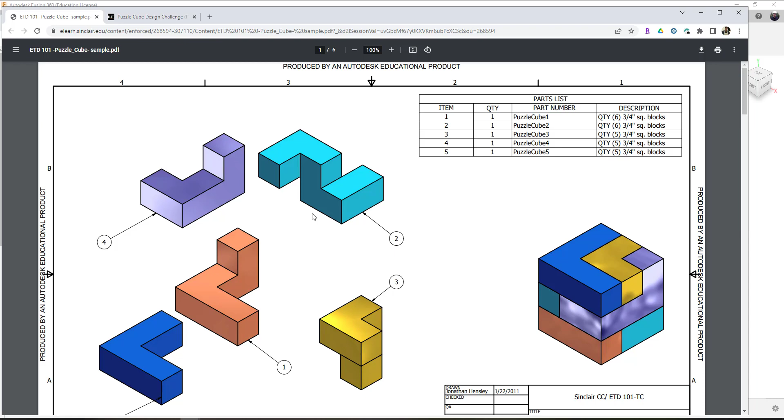You're going to basically be creating a PDF package of drawing sheets. This PDF package will look similar to this, where you've got your puzzle cube exploded assembly, solid assembly, parts list, balloons on sheet number 1, and then all the subsequent sheets afterward indicate the individual parts and dimensions.

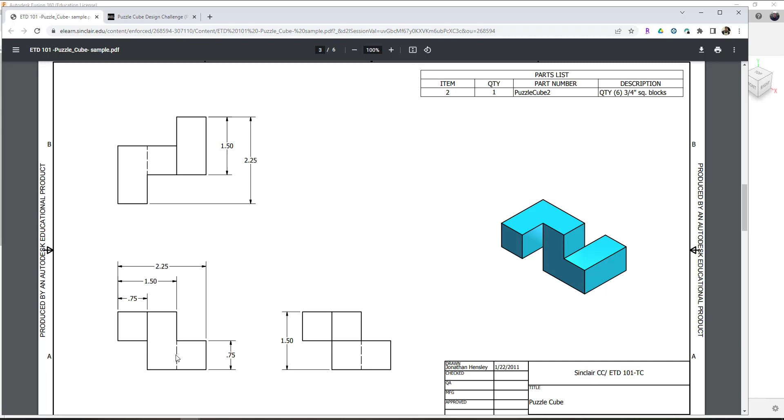Now it's important, like in this piece, to have it fully dimensioned. You're going to have hidden lines shown for the surfaces that you can't see, and the dimensions indicate the size of the object. Notice that all the dimensions are dimensioning to solid lines. Nothing is being dimensioned to the hidden lines.

Each of these parts ultimately gets created in a similar fashion. The rules, you've looked at those before. You can't have the same parts. You have to have a minimum of 5 different parts, and you'll have 6 drawing sheets. So 5 parts plus the 1 assembly, exploded assembly.

So in this video, we're going to show you how to assemble some of the puzzle cube parts, how to explode them, and how to create a drawing sheet of the puzzle cube. We're going to do that here in this instructional video. I've created a couple of puzzle cube parts already. We're going to create a third one.

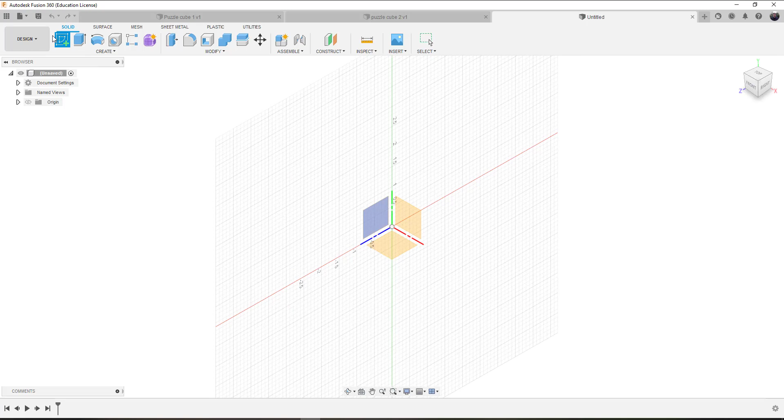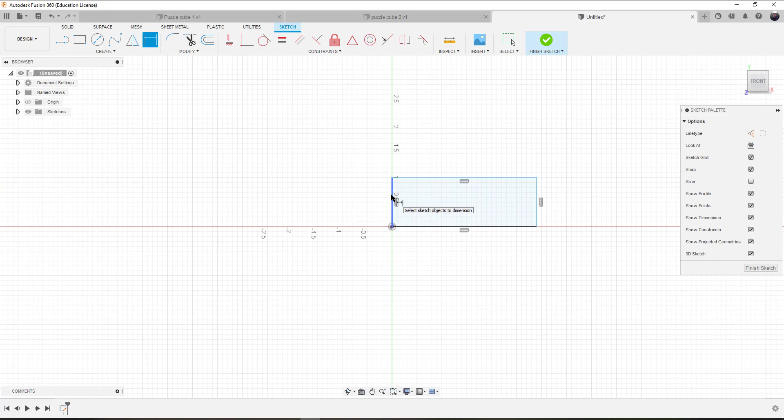Again, when you start, you're going to pick the sketch command. You'll pick one of the 3 XYZ locations. I'm going to work in the front view. This particular cube is going to be kind of unique, so I'm going to use the rectangle and create a rectangle shape, and dimension it - that needs to be 0.75, and this one is going to be 1.50 for the overall length.

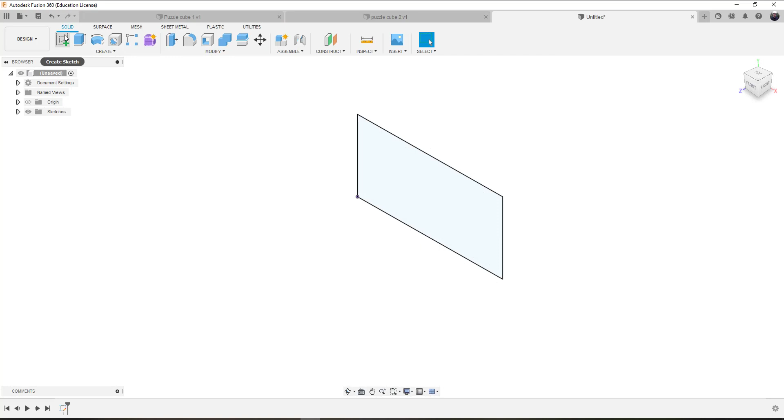We'll go back to the home view up in the upper right hand corner, and we'll extrude this and finish the sketch, extruding it by 0.75, because each one of these cubes is 0.75. And I'm going to create another cube that's going to sit on top of this.

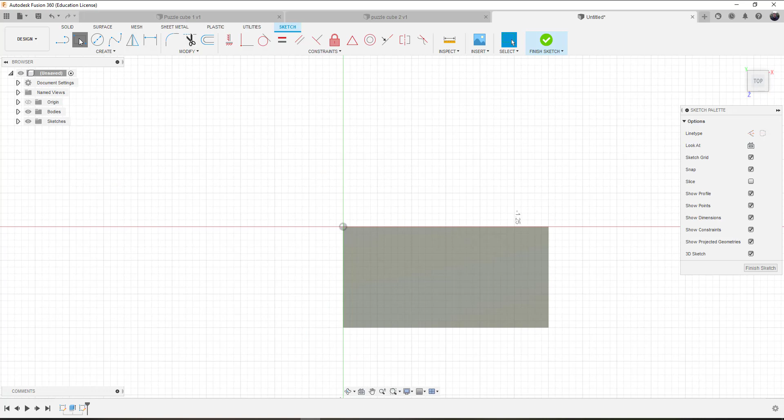So I'm going to create a sketch, select the top of the cube, look down at it, and then create a rectangle for this particular cube. Again, it's our call on how we want to design this part. So this cube is going to be 2.25 inches long, basically 3 cubes, and 0.75.

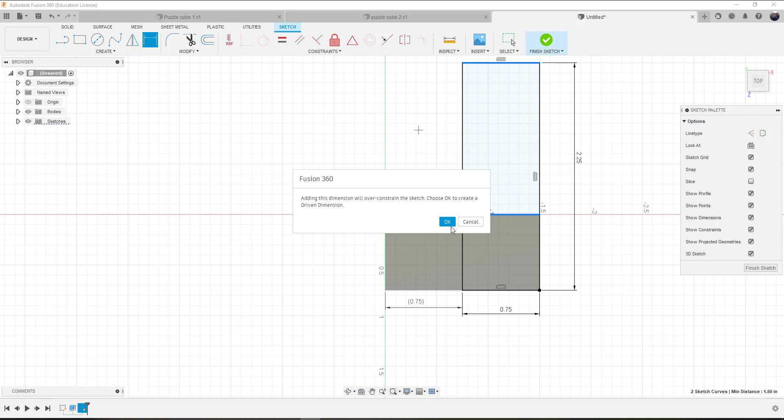If you think about it, this not only has to have the size, but we also have to have the position, because I might have picked points that are not accurate. So we're going to dimension the side of the object to the side of the original cube, and if it comes up and says it'll over constrain the sketch, fantastic - that just means I don't need to place that dimension, that it is accurate. The dimension from here to the face of the cube should be 1.5, and again it tells me I don't need that. So this particular cube is anchored.

Now I place the dimension as what is known as a driven dimension, or a basic dimension is the other term you're going to hear, and that is the parentheses. So it's not used for calculations, it's there just to give information.

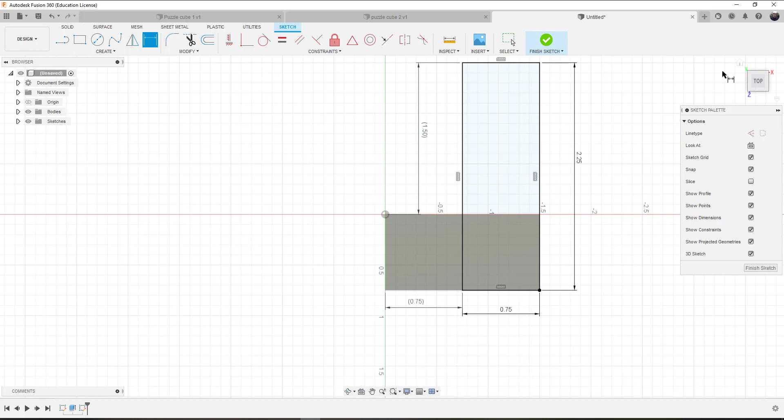Back to the home view, finish the sketch, extrude our shape, but we need to extrude both parts. So we want to extrude everything up 0.75, and we have our part.

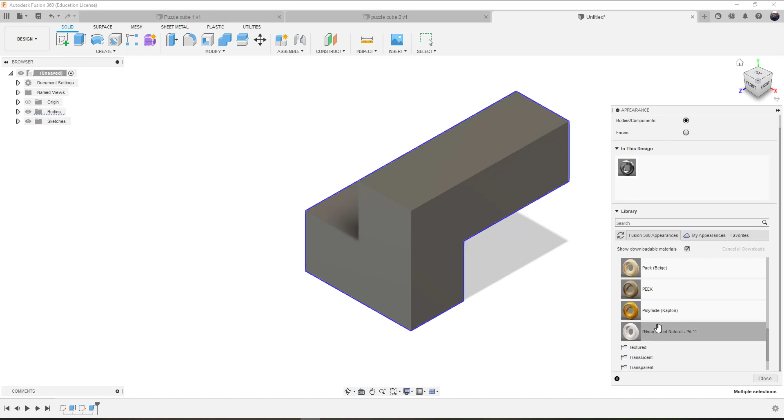Now once we have this part created, we can window around it, right mouse click, and we can go to appearance. When we choose appearance, we'll get a window that pops up here, and then we can choose the type of color we would like to use, whether it's wood, paint, plastic. So I'll do plastic this time. There's a variety of different plastics, textured, colored, and so forth. Not a whole lot of good colors.

Paint always has good colors. They've got all the basic colors in paint here, and we can do a yellow part. So we're just going to drag and drop the yellow color on our part, and our part will turn colors. You want to do that at this step to colorize your parts and make them look good. Then you can just hit the double arrows and shrink the appearance menu back.

You'll want to save it, so we'll pick the save button. We're going to make this Puzzle Cube 3.

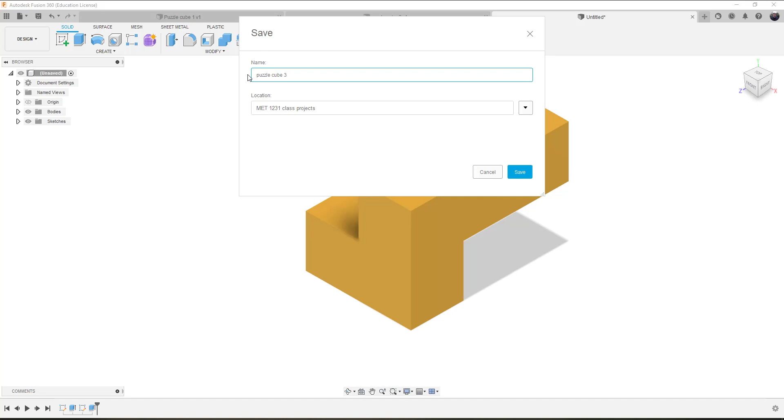And it's in my class projects folder. Alright, so now I've got 3 puzzle cubes. I need to assemble them. So how do I do that? Well, I can create a brand new drawing and assemble all the cubes in a brand new drawing space.

So I'll pick the new component and type as standard. This is going to be an external. Let's see here, location is Tom's Projects. Okay, so I got sidetracked for a second.

The assemble is not where we actually add the products. We actually have to go over to the data panel, and under our data panel we will find, let's see here, I need to find my folder here. Had to back out of Tom's Projects and MET 1231, and then I've got my 3 puzzle cubes.

So I've got my new drawing space, and all I need to do is right mouse click and then insert into the current design. So the key is save your work first, and then you're able to insert it into your current design. I wonder

if it allows me to drag and drop. Please save the design, so I have to save this first. So let's go ahead and hit save. And this is going to be Puzzle Cube Assembly.

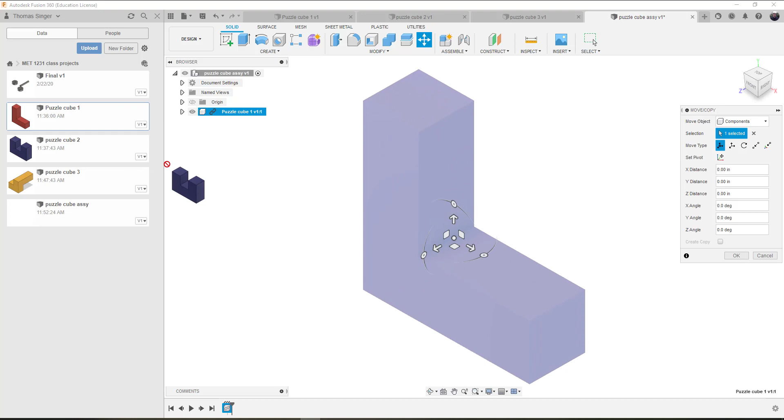And then I can just drag and drop these into the Puzzle Cube Assembly. Okay, now they all sat on top of each other, and I can slide them around and move the objects where they need to get moved in this design. But you can see that we've got 3 objects.

So now what we're going to do is assemble these, and we'll use the assemble tool here to quickly apply the joints that we need to accomplish. So what we want to do is go to the joint command. We're going to go ahead and take this, and again, the key on the joint is direction.

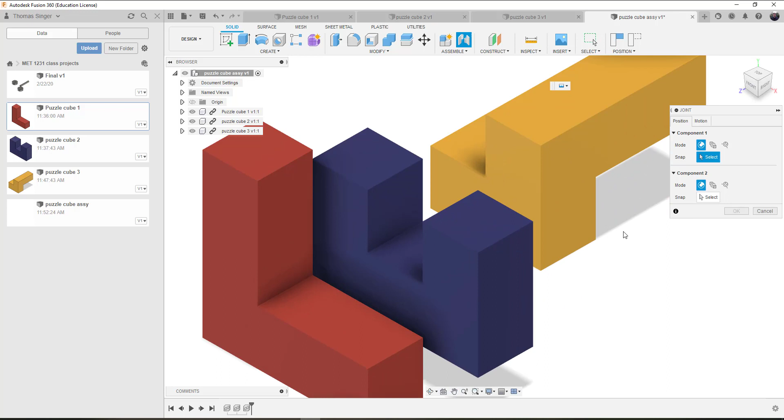You can see on my screen that I can put a joint vertically or horizontal on the surface, and I want to connect that vertical joint to this object. So we're going to go ahead and connect this vertical joint, but I'm thinking, how can I make this even better? So if I spun this around,

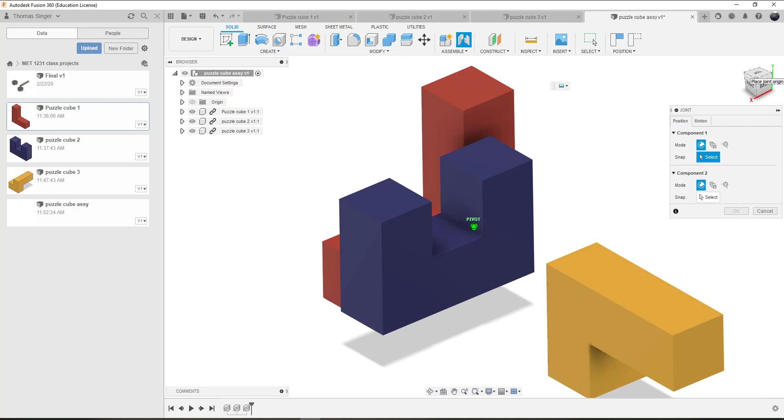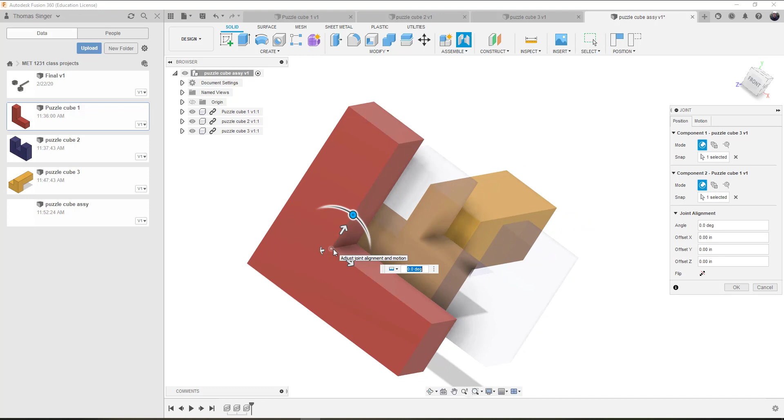could I select this joint instead? Yes. So I can pick this joint, and I can then pick this corner to connect that joint to. And then we can rotate this around by left mouse clicking and holding on the view cube and rotate it around, and that's exactly where I wanted to put this.

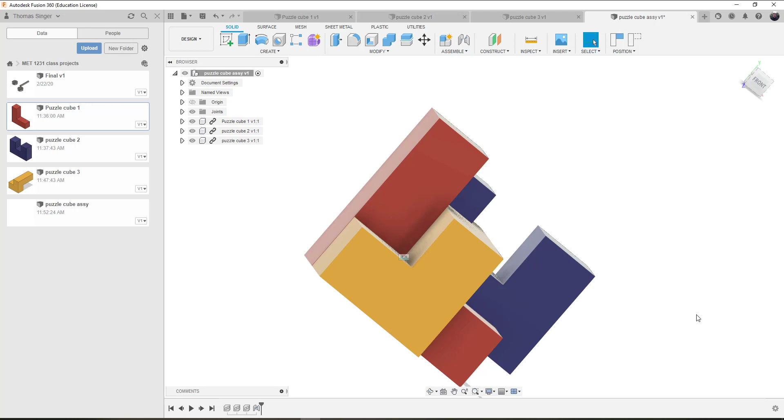So again, you have to think about how that joint is going to connect. So how are we going to connect the 2 parts? And then we'll choose OK. Go back to the home view, and obviously the blue part is still out there floating.

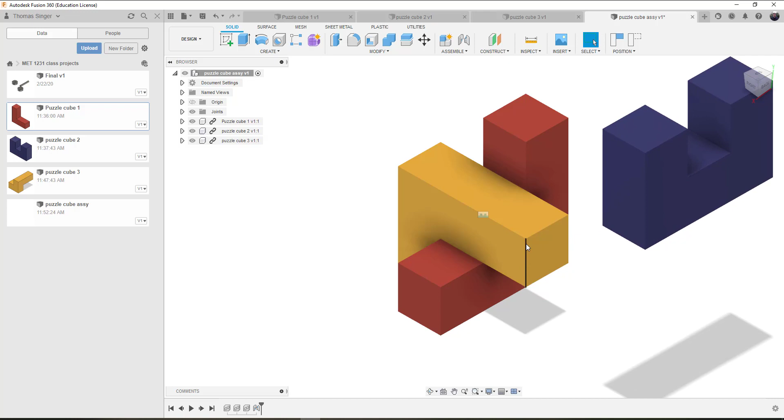We're going to go ahead and put the blue part on the yellow part. So thinking about that, if we rotate this around, we can take one of the corners of the yellow part and connect it to a corner of the blue part and make

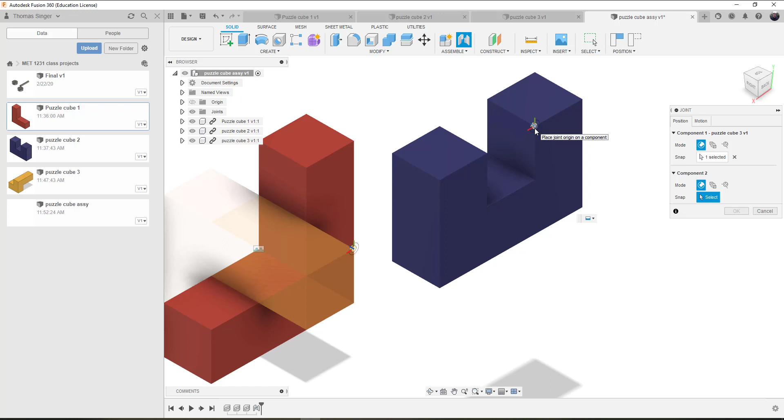that the joint. So we can pick the joint in this upper corner of the yellow part and pick the joint in the upper surface of the blue part. And the two positions will connect, and that's the idea, is you want to pick 2 points that connect and choose OK.

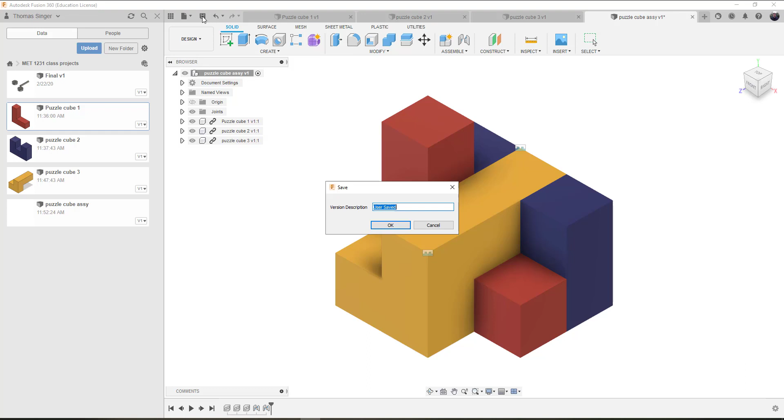Now, even though it looked kind of weird on the preview, I had a comfortable feeling that it was going to connect properly. And so now our 3 puzzle cube pieces are connected. We'll go ahead and hit save, and we've now saved, and we can always put a note in of that save. Perfect. So now it's assembled.

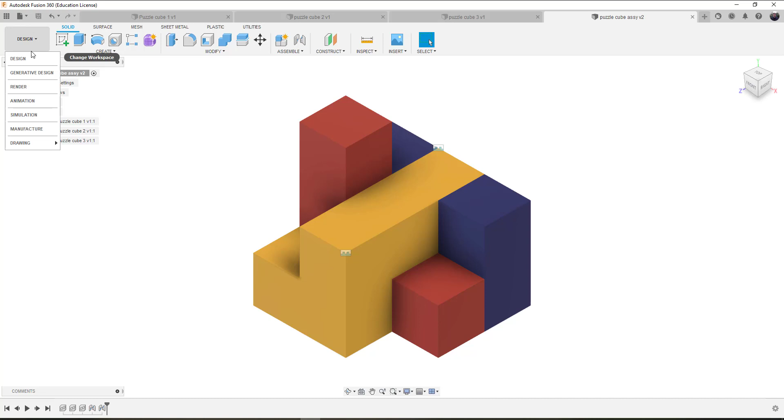We'll go ahead and close the data panel because we don't need the data panel anymore to bring more parts in. But now we need to animate this to make an exploded assembly. So we'll go over and choose the animation tool. So instead of design, we're now in animation.

And for that to occur, what we're going to do is transform these. And transform means that we're going to move these based on a timeline on the bottom. So we're building a story of how this was assembled. And if you think about how we assembled it, we can also disassemble it in a similar fashion. So what we're going to do is,

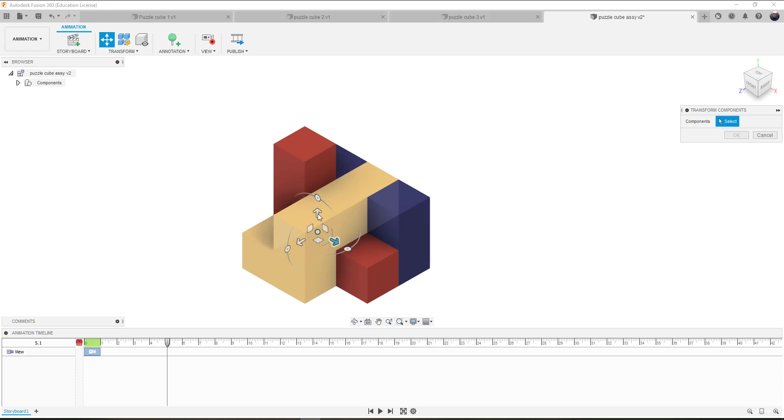okay, at 5 seconds, or roughly 5 seconds, I'm going to go ahead and transform or move the yellow component. And I'm going to move this yellow component straight up. That's cool. I'm going to move this to 9 seconds, and I'm going to move the yellow component back. And then I'll choose OK.

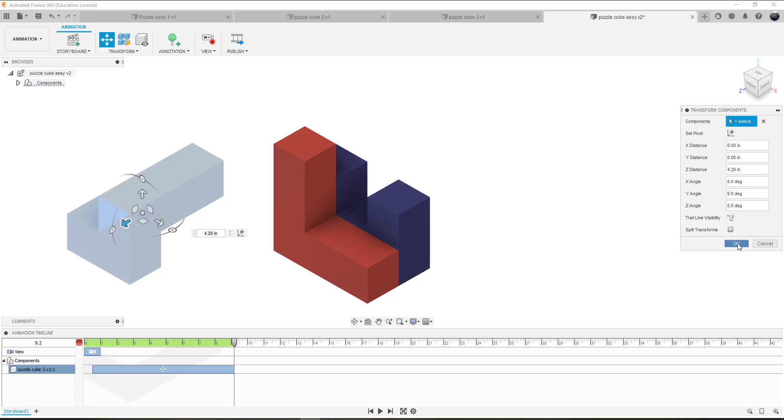Alright, so that component was now moved. I'm going to move the blue component, but the red component is going to stay in the same spot. So I'm going to go ahead and slide this forward here, and we'll do 14 seconds, and we'll move the blue component away and up, and we'll choose OK. And you can see what happened is that it kind of manipulated the storyboard here in

the bottom, the timeline, and you can show, alright, puzzle cube 3 moved here, puzzle cube 2 moved there. We can hit the play button or the rewind and watch what happens. So the object, this actually will move diagonally away because we did horizontal and vertical. Same here, diagonally it moves away.

Now, if you wanted to move it horizontal first, you'd have to do a horizontal movement first. Stop, accept it, then do a vertical movement first. So if we wanted to delete that blue move, that blue part move, we could.

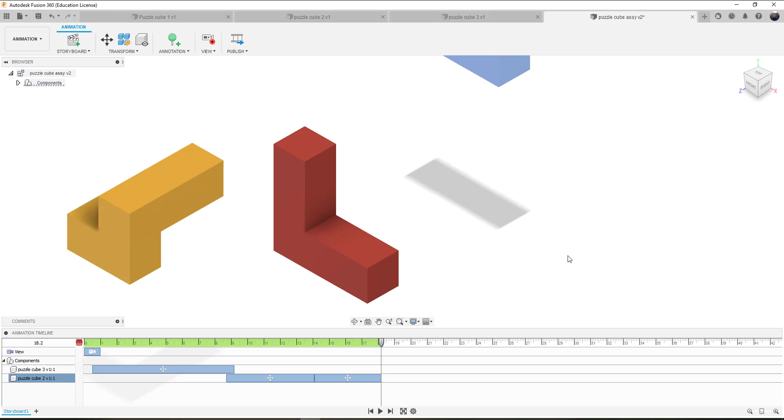Okay, so now the blue part's back to where it was. We'll transform this in a 2-step process. So we'll pick the blue part, slide it over, choose OK. Now we'll move it over to 18 seconds, pick the blue part, go vertical, and choose OK. So now we have a couple of moves in the blue.

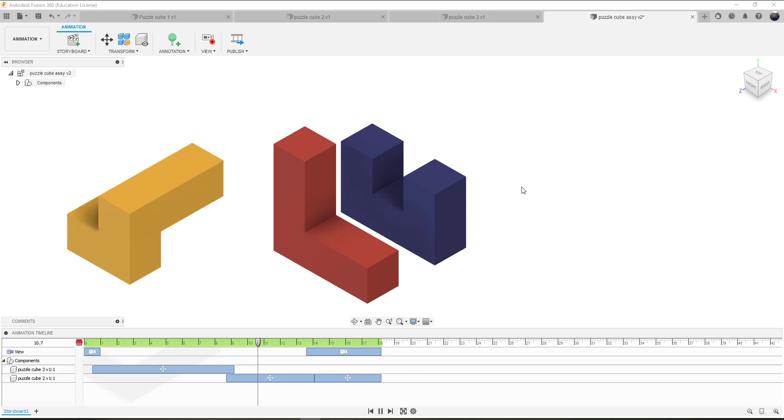And then we'll hit the rewind button and hit the play button. So the camera moves out and we can control the camera too. That's a whole nother aspect of this process. But you notice that it moves straight back and then up. So we can control the assemblies.

Alright, so now we've got the animation done. So now that we have the animation done, we can hit the save button and it's going to be animation.

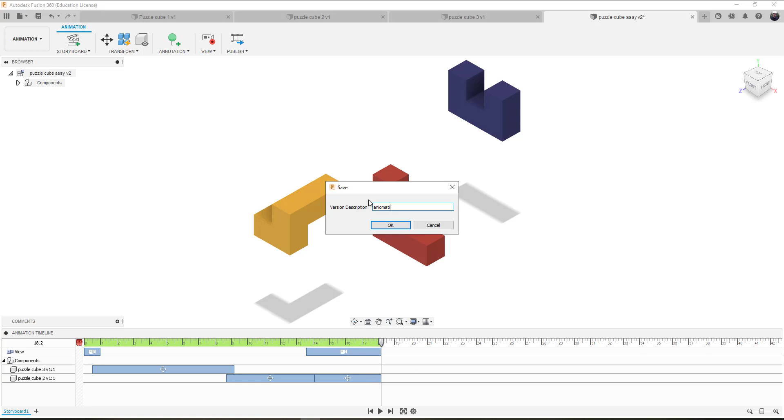Alright, so the animation is complete. We now need to create the drawings. And so with the drawing portion, what we have to do is start with a drawing, and we can pick it from the animation or the design. So we're going to do a drawing from the animation first, and then we'll create a drawing from the design second, and then move them together. So we're going to do two different types of drawings.

So from the animation, since I'm here already, we're going to create it. It's going to be based on the storyboard. Now, if we wanted to do an assembled assembly, I would want to move all the parts back together again. So we'll move the parts all back together again. And I need to do a screen capture.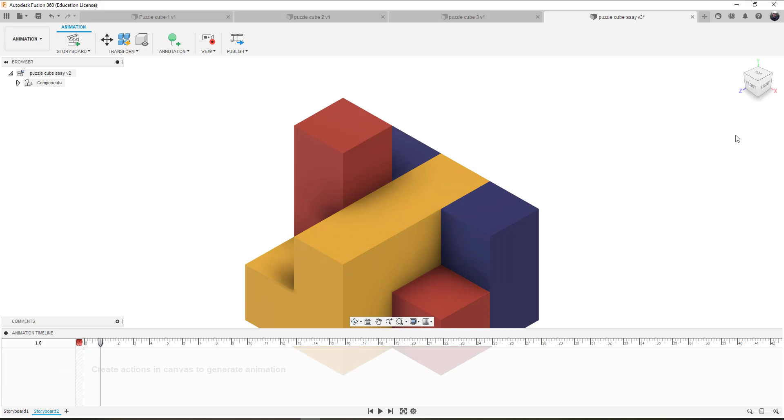Let's see here, how do I want to do this? I could create another storyboard, storyboard number 2, and this one's going to be clean. So now storyboard 2 is the assembled assembly. Okay, so I'm not going to move it at all. Okay, and I'll hit save, and I'll say storyboard 2. So now I've got storyboard 2, which is the assembled assembly, didn't move any parts.

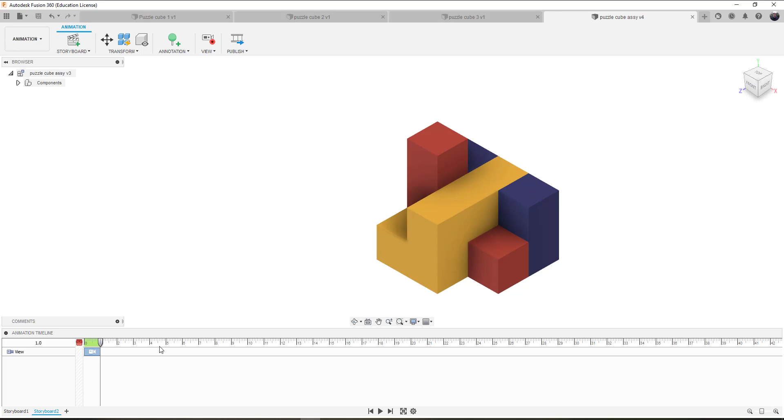Storyboard 1, which is the exploded assembly, with all the parts exploded. So both are good. So storyboard 1 and 2 are on the bottom, so we're all set.

We're going to go ahead and create a drawing from the animation. It's going to start with storyboard 1. It's going to be new. It's going to be a B-size sheet of paper, and we're going to choose OK.

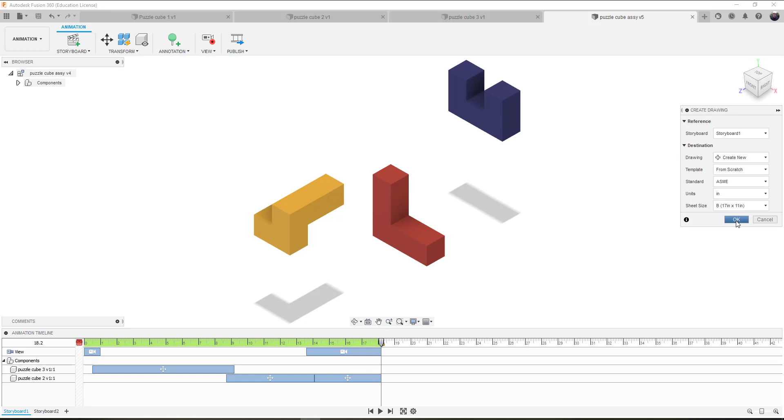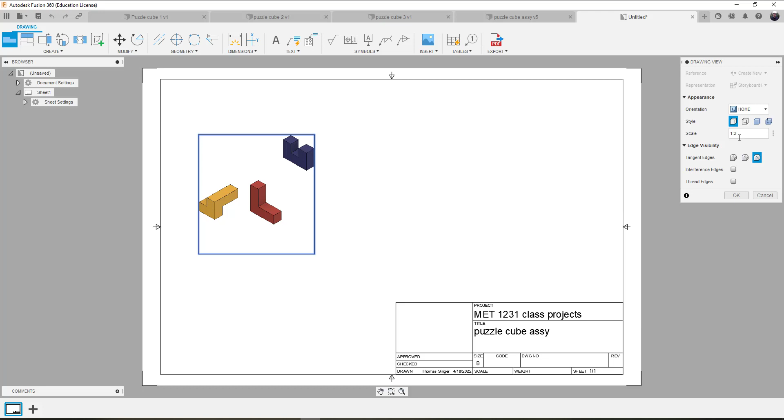So here's a B-size sheet of paper. Here's storyboard 1. We can place our base view. That's the exploded view. So far, so good. It says that it's 1 to 2, the scale factor, and it's the home view.

Perfect. Now, we can right mouse click in this view and edit the view. And editing that view is going to allow us to shade it. And we'll want to shade this view because it is solid, and it is an exploded assembly.

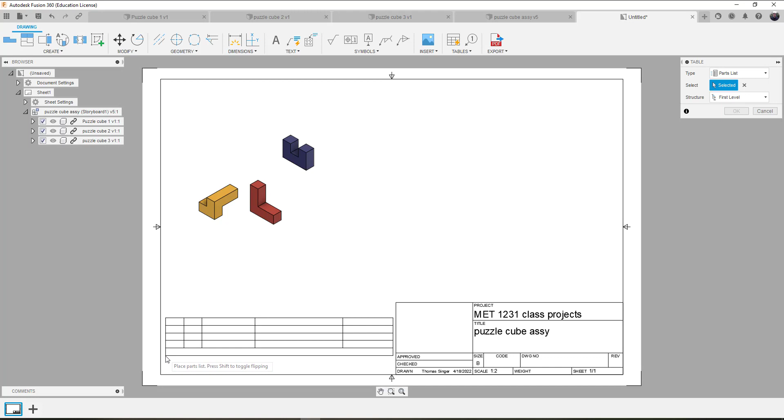We can also create tables, and that table is a parts list. And we can create this parts list here at the bottom. And we can control all these fields too. We can edit the parts list to control the fields.

Now, we should be able to create a new view, a new base view of storyboard number 2, which is our solid assembly. So we're going to create a new base view. Representation is going to be storyboard number 2, and it's going to be shaded. And there we have it. And 1 to 2 is our scale.

So we shaded that, that's there. We'll choose OK. And now we've got an exploded assembly, an assembled assembly, parts list, and balloons all in one space.

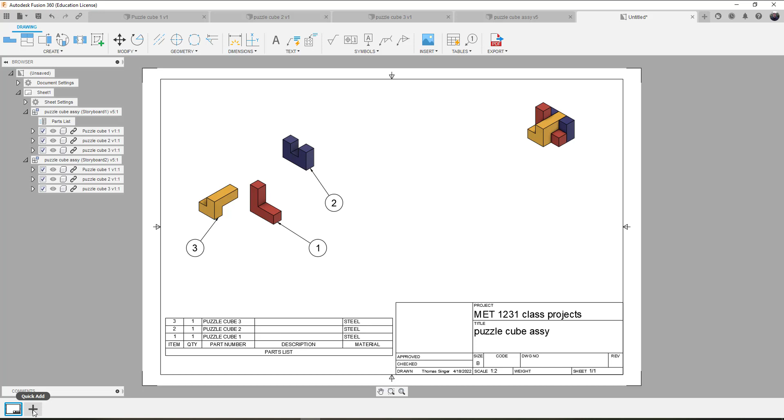From here, we want to create another new drawing, but that new drawing is going to be created based on a design. So we've got a couple of options. The first option is to create the drawing right under this one by hitting the plus sign and starting a new drawing. The second option is doing something similar and then bringing in views from a previous drawing that we might have created. So I'm going to stop the video for a second, create a bogus drawing of the blue part, save it, and then we'll come back and do both types of design capabilities.

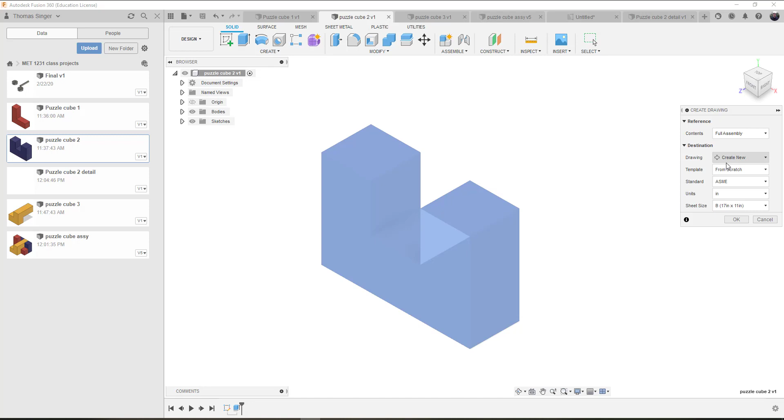Just quickly, to create a drawing from an existing part, you have to open the existing part, then change to the drawing from design option. We'll come up with the same process, and we're going to go ahead and choose OK.

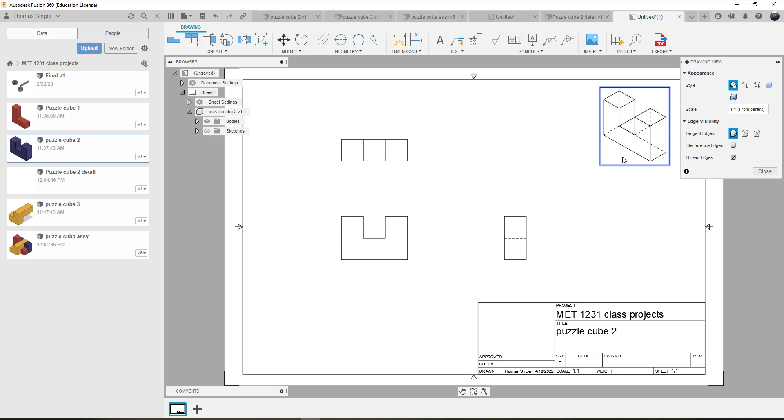It'll show another drawing sheet, and this will be our front view. We'll then project from the front to the top, to the right side, to an isometric, and right mouse click OK. Notice that the hidden lines are automatically placed. We'll edit the isometric view, right mouse click and choose edit view, select the view, and we're going to shade this view.

From here, we can add our dimensions, and annotations and dimensions are shown. So we'll go ahead and add a couple of dimensions here to show you the process of just picking the corners and adding the dimensions. Again, position the dimensions in such a environment so that it is accurate, and make sure that there are dimensions placed on all three drawing views.

Alright, we'll go ahead and hit the save button. Puzzle Cube 2 drawing, hit save. We're all set.

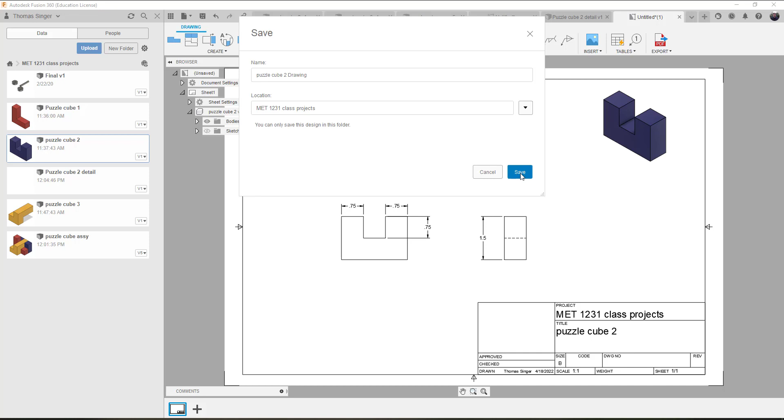So now that I've got a drawing sheet here, I can then take this drawing sheet and bring it into my assembly drawing. So we'll do that here next. So here's our puzzle cube.

Oh, we haven't saved this yet, so we're going to need to do the save on this one, because it's probably not going to let us do this puzzle cube assembly full drawing.

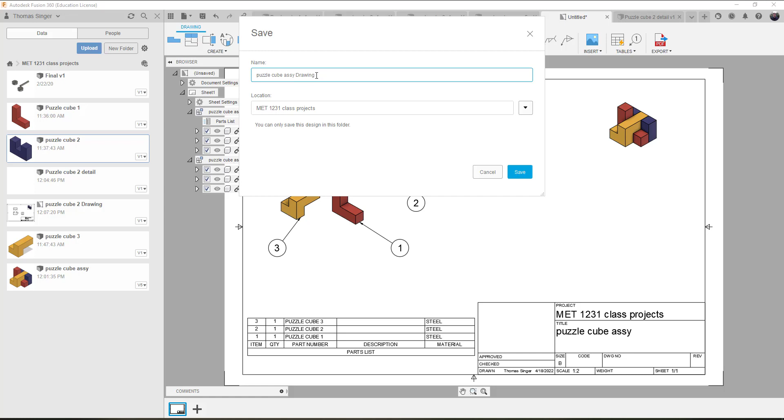Okay, and we want to add a new view. Well, we can go to the puzzle cube detail. Let's see here, where did our puzzle cube detail go? That didn't turn out well. So how did that not get saved? Oh, puzzle cube 2 drawing, that's what I was looking for, not the detail.

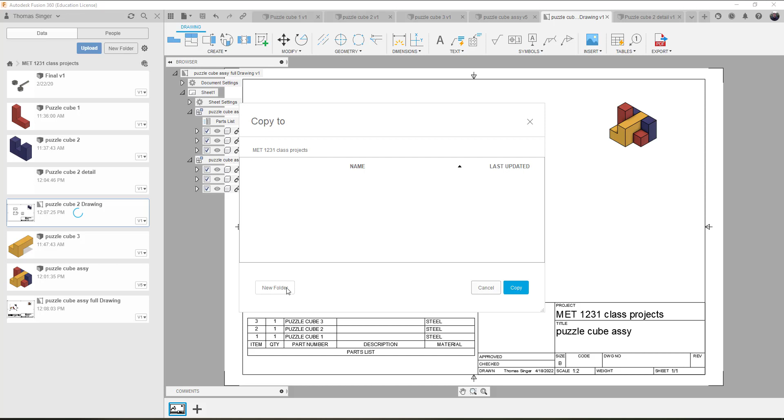And what we wanted to do is grab this puzzle cube sheet, sheet number 1, right mouse click and copy it. Or I think I should be able to just drag and drop this into the puzzle cube assembly full. Copy. So we're trying a couple of different things.

Okay, I did some digging around and discovered that currently Fusion does not allow me to copy an existing drawing sheet into another packet, as far as I know. So in essence we will have to recreate the drawing packet.

To create the puzzle cube multi-sheet environment, we go back to the original assembly, choose the design option, we right mouse click on top of one of the puzzle cubes and choose create drawing.

From here we want to select a specific puzzle cube, and I right mouse clicked on puzzle cube number 2, which is the blue one, which is fine. But I want the drawing to be part of the original puzzle cube assembly full drawing, and I want it to create a new sheet under that, and we'll choose OK.

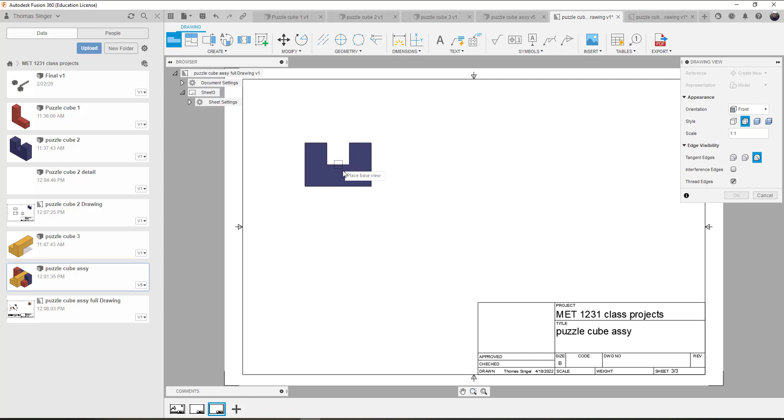So now it goes to that drawing sheet environment. I can then pick my front, project my drawing views just like we shown before. But now if you take a look, let me go ahead and delete that extra sheet. We now have the first sheet, we now have a second sheet, and for us to create the third sheet we can go back to the assembly.

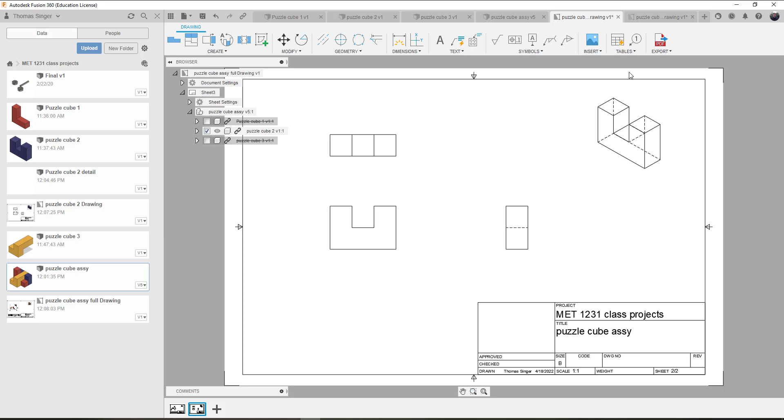Right mouse click on puzzle cube part number 3, create the drawing. We selected it, we want to be part of the full drawing sheet. Create a new sheet, choose OK, and we'll say that that's my front.

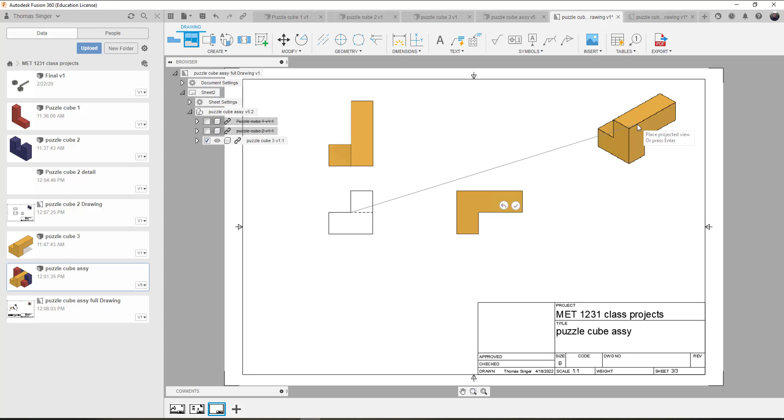Project the top, right side, isometric. So now I've got another drawing sheet for that. So now I've got sheet 1, sheet 2, sheet 3. And I go back to the balloons, and alright, so I need to get the last sheet positioned.

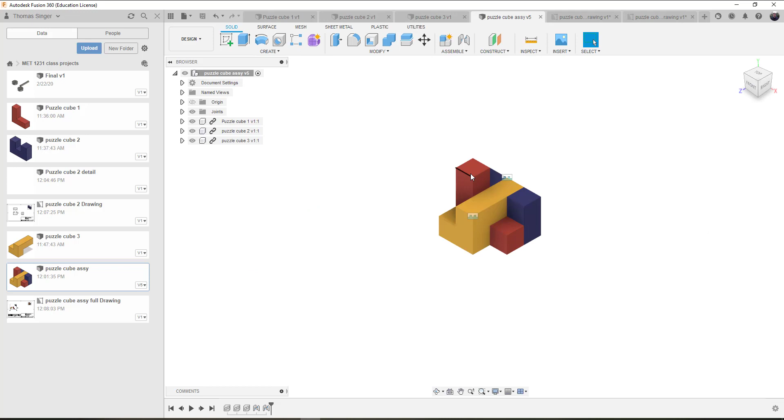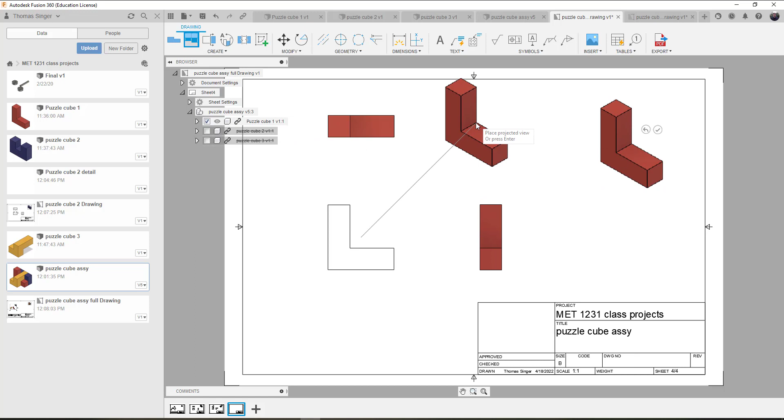So I'm going to go ahead and pick Puzzle Cube Part 1 and create a drawing. Back to the full drawing, create the new sheet. And there's my projections. Okay, so my projections are all here.

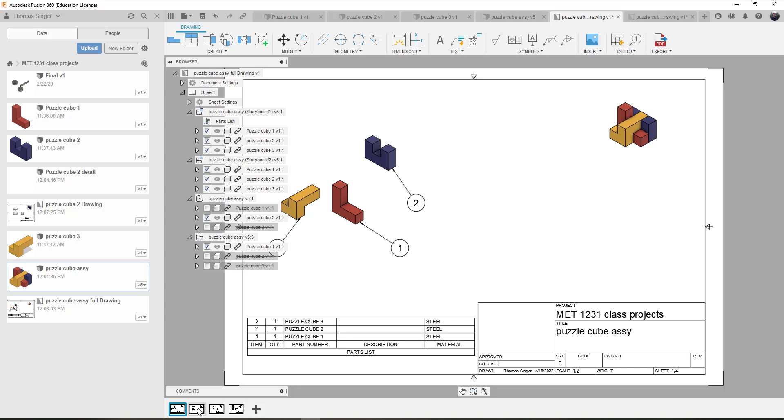But now when I look at my drawing sheets, part number 1 was the red one, 2 was the blue, 3 was the yellow. Well, that's now sheet 4. So the good thing is that I can drag that red sheet on the bottom of my screen to part number 1. So now this becomes sheet number 2 out of 4, sheet number 3, sheet number 4.

So again, I can edit these views to create the shading and all the other necessary details overall. That's the process of creating a drawing packet. Then go back and add your dimensions. Remember not to dimension hidden lines. Place dimensions between the part drawings. Make sure that there's room between the drawing environments. So the idea is that you want to make sure that you apply the appropriate dimensions and so forth.